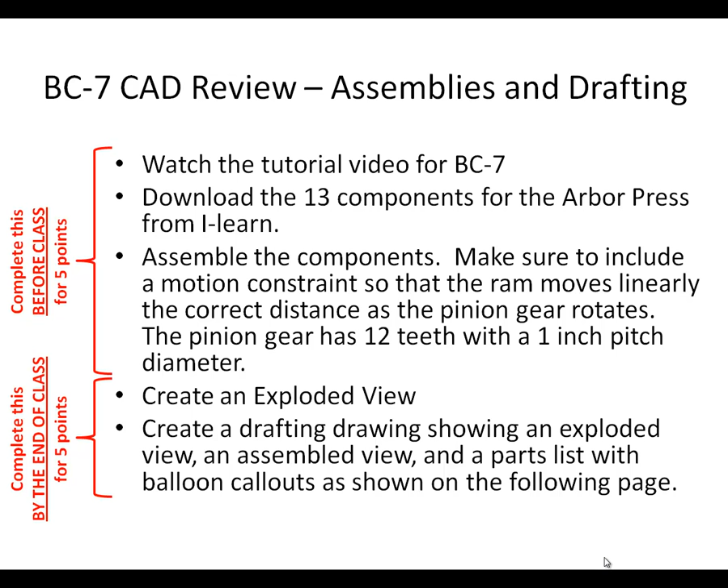For the remaining 5 points, those 2 bullet points can be completed during class time: create an exploded view, create a drafting drawing showing an exploded view, an assembled view, and a parts list with balloon callouts as shown on the following page. So during class I want you to create this drafting view. Let's get started.

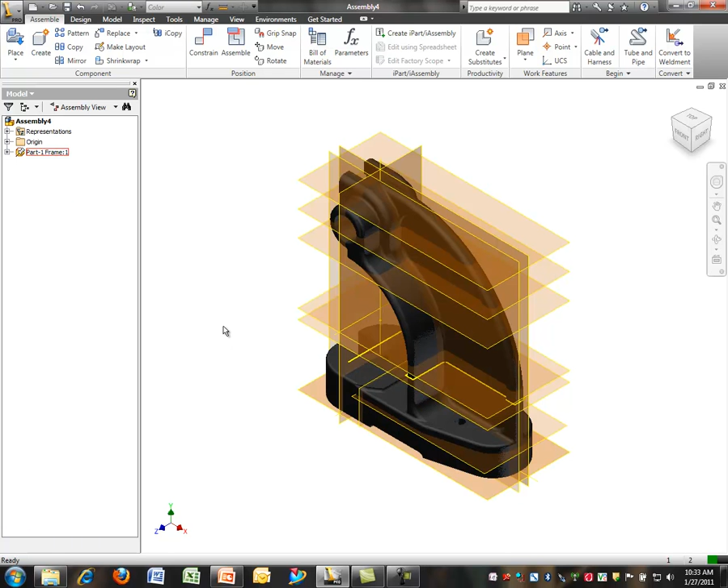First you'll need to download these 13 parts from I-learn. Let's do a new assembly, and we'll bring in the very first part, the frame. Notice that when I bring in the frame, it shows this little push pin—it's grounded the first part so I don't have to constrain it at all, since it can't move. Now I can go ahead and bring in the second part.

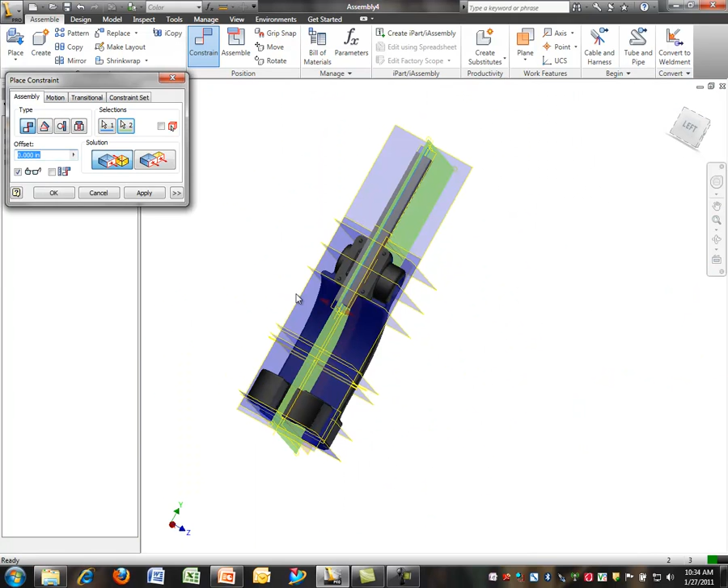Let's bring in the ram, and we'll constrain it. We'll bring this plane mated with this plane, and take this datum plane, center datum plane here—that's all the constraints the ram needs. We can see that we can move it up and down, but not side to side.

Let's now bring in the pinion shaft. The pinion shaft will need an insert constraint. Let's insert this circle up against the edge of this hole.

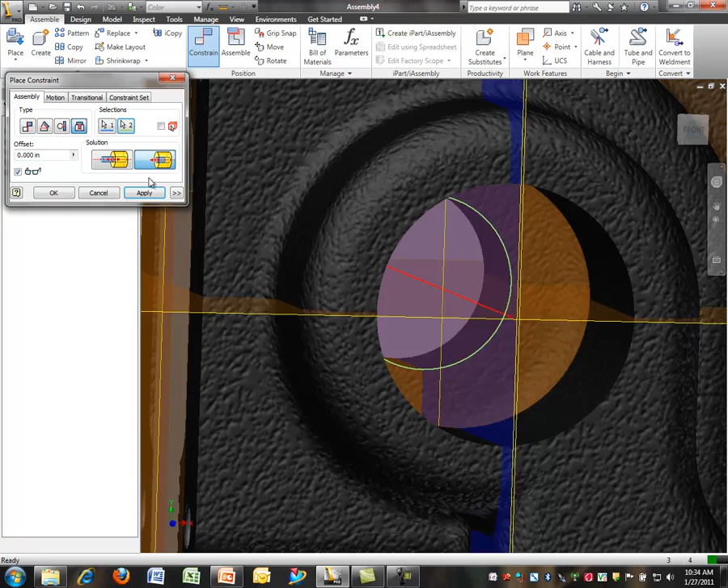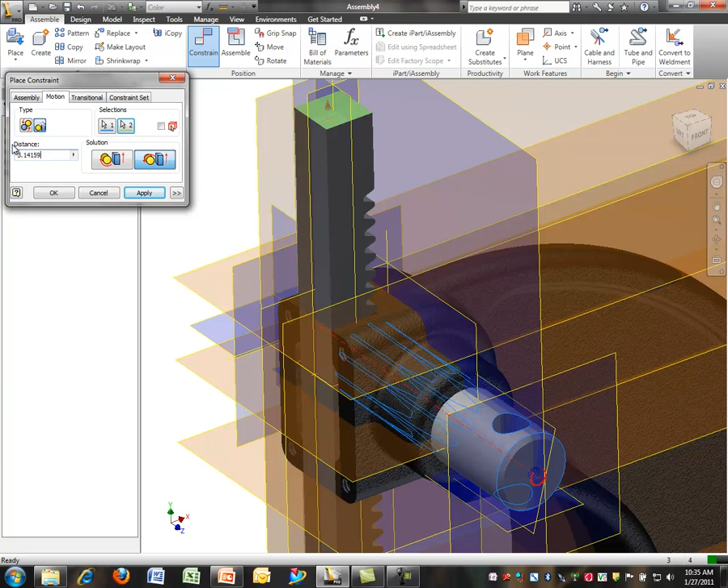There's the pinion shaft, and now let's put a motion constraint between this pinion shaft and this ram. We'll make it this linear circular to linear constraint, and choose this option so that as we rotate it moves the direction we would like. Because it's a 1-inch pitch diameter, every time I rotate the pinion, the ram should move pi times the pitch diameter. Let's apply that.

Okay, so now as I grab hold of this pinion and rotate, the ram will move the correct distance because I specified that in a motion constraint.

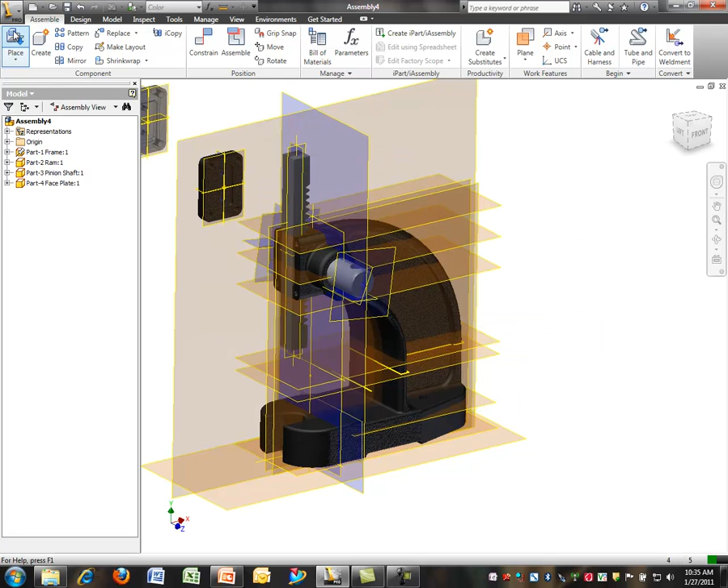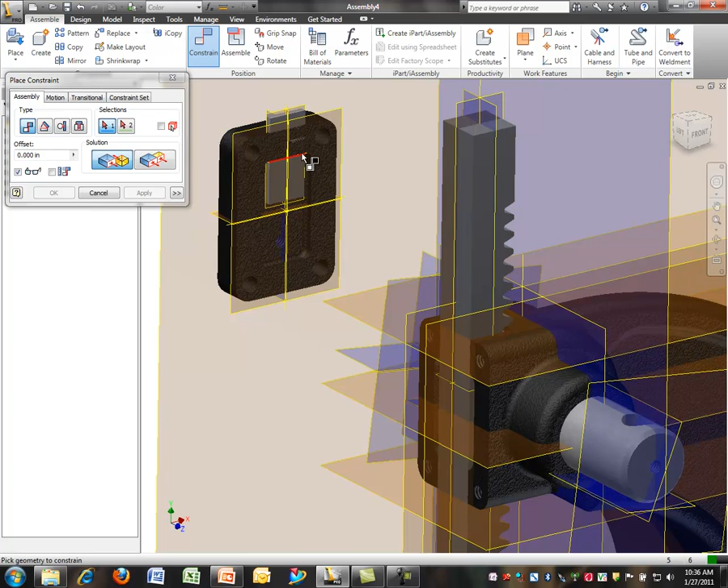Now let's bring in the next part, this face plate. We're not ready to constrain it yet because we need to bring in the jib plate first. Let's bring in the jib plate and constrain it so that it's flush with this face, and make sure it's centered in the face plate. We'll take that plane and this plane, bring them together, and do it vertically as well—this plane and this plane, making those flush. So now the jib plate is inside the face plate.

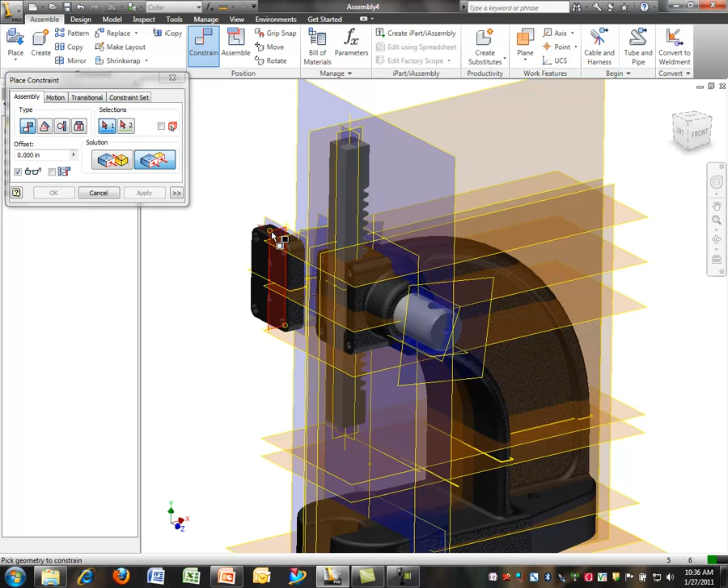Now we're ready to bring the face plate up against the main frame and center it. Okay, so now we have the face plate on. We're ready to go grab another part.

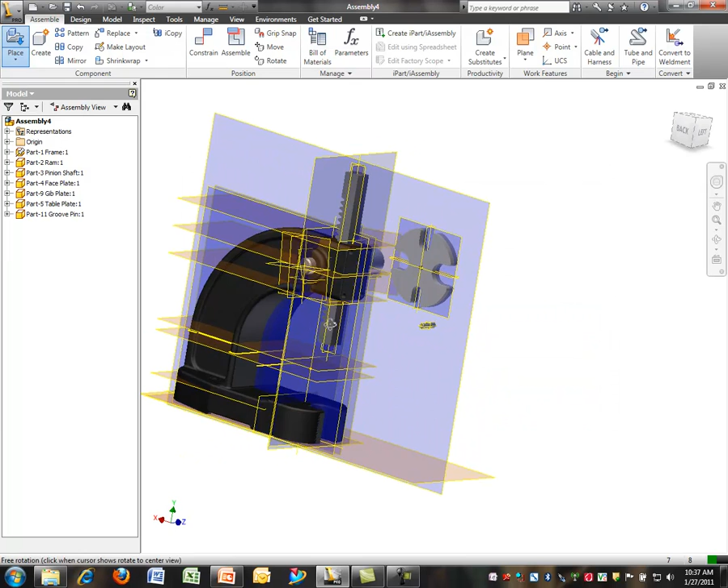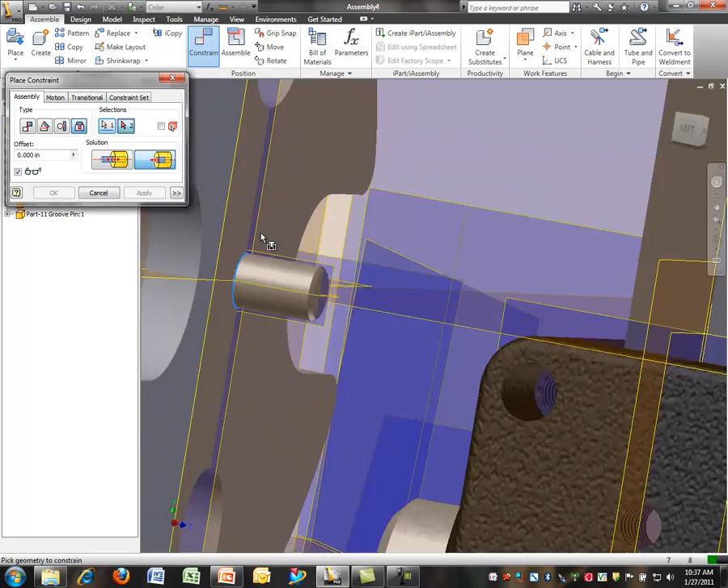Let's grab the table plate. We're not quite ready to constrain it yet because we need the groove pin. Let's constrain this groove pin using an insert constraint, inserting the end of the groove pin up against the end of this hole with that option—that's a press fit. That groove pin has a groove, so you'll pound it in and it'll be wedged into that table plate. Now let's take the edge of this hole and insert it up against the edge of this hole with that option.

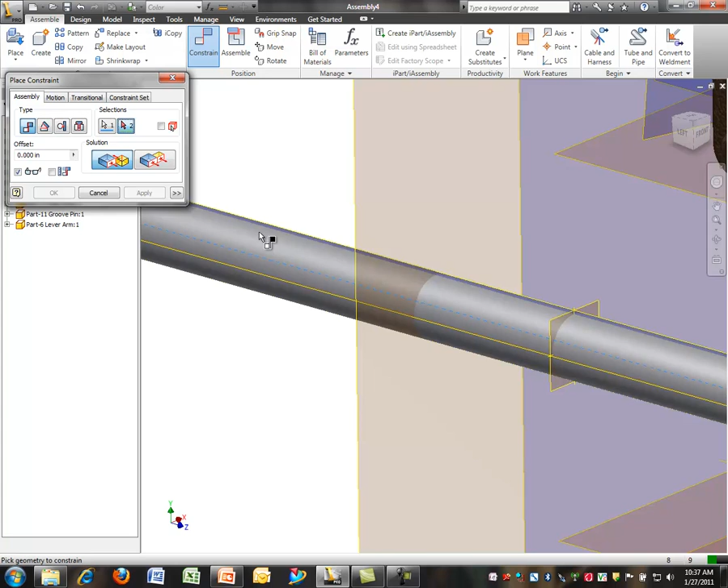Let's bring in another part—now the lever arm. We'll constrain it by taking this center axis and putting it inside this center axis, and then taking this plane and mating it up against the datum plane for the center of the pinion, making it flush.

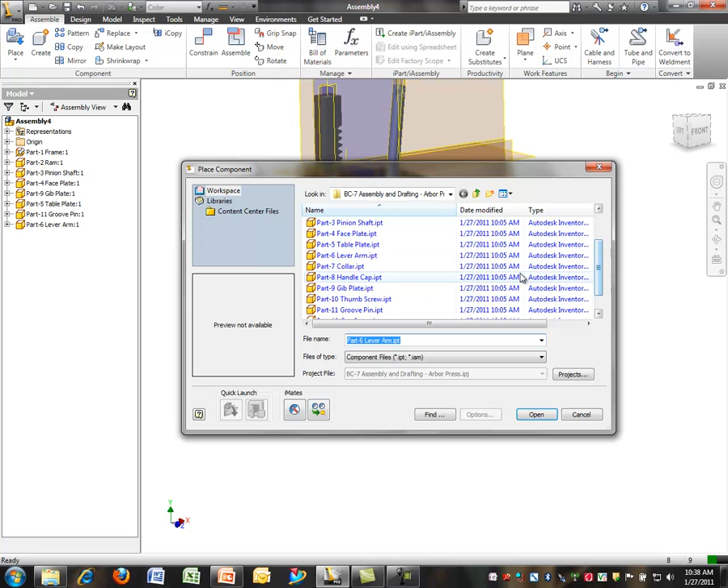So there's the lever arm. Now let's go ahead and bring in the caps, the handle caps. We're going to need 2 of those, so we'll place 2 and constrain them with the insert constraint, grabbing the bottom edge of the hole and inserting it up against that handle. We'll do the same with the other cap on the other end.

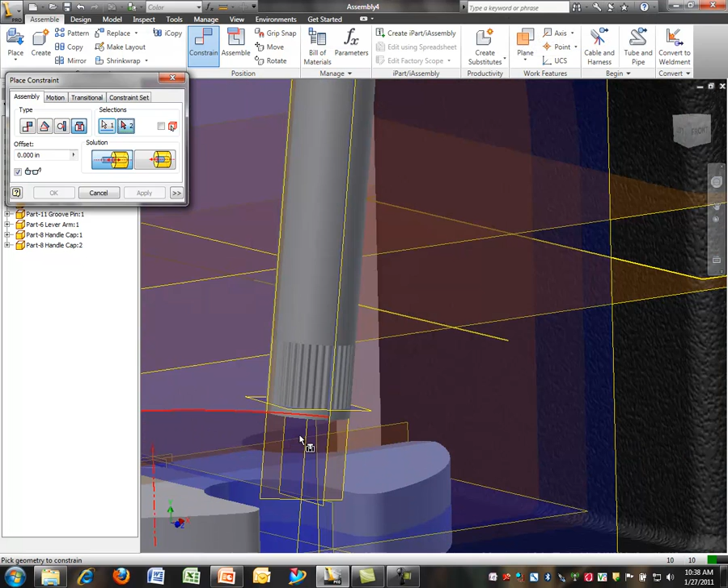Okay, now let's bring in the collar. We'll take the insert constraint and insert the edge of this up against the edge of this hole. Apply that constraint. And now let's also take the center plane.

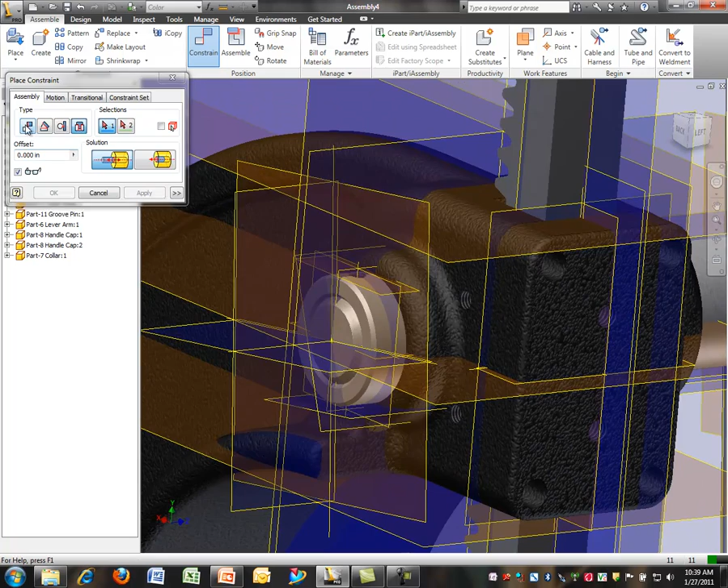We want that to rotate with the pinion shaft, so we're going to align the planes with this flush constraint. I'm going to go ahead now and turn off all these datums that are becoming such a nuisance to look at. I needed them so I could constrain some datums together, but it also makes it a nuisance to look at, so we might need to turn those on and off as we place different components.

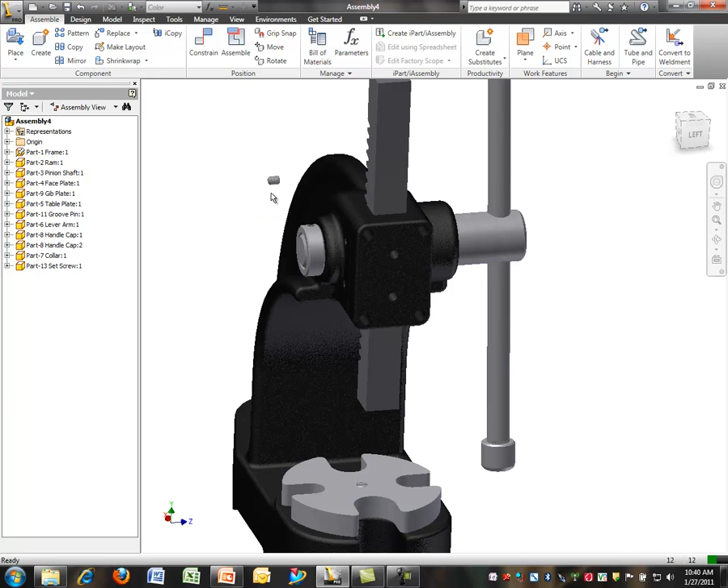Now let's bring in the set screw. I'll place the set screw here, and the first thing I'm going to do is rotate this set screw so that it's approximately in the right orientation so the computer can assume the correct position when I make these constraints.

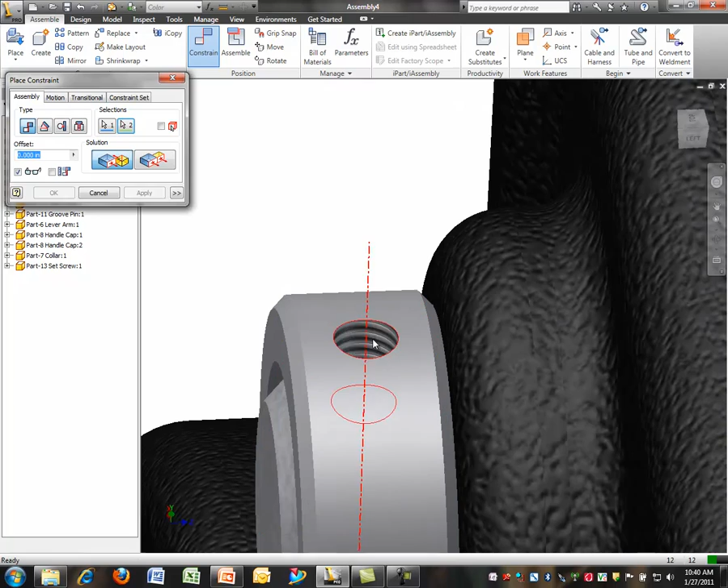What I'll do is take this center axis and align it with the center axis of the collar, and apply that. Then I'll make another constraint, a tangent constraint of this face, tangent up against that cylindrical face of the shaft. That places the set screw up against the shaft.

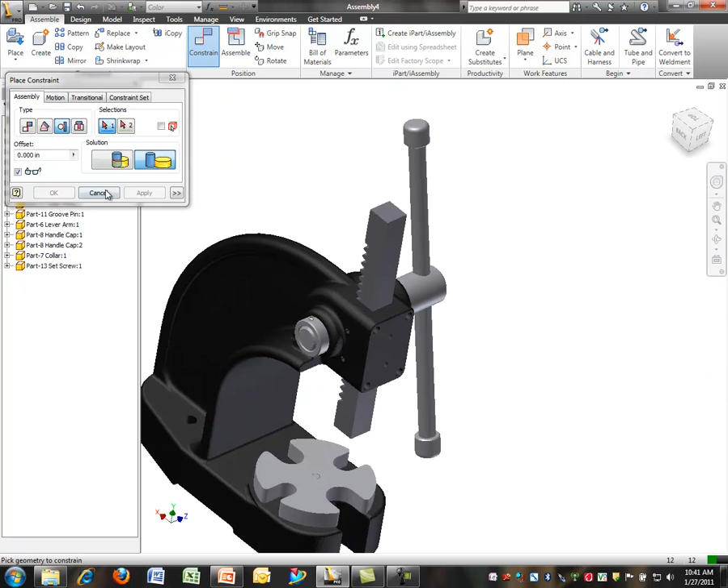Okay, now let's place some thumb screws—1, 2, 3 thumb screws. I'm going to go ahead and rotate those and orient them so that they're roughly oriented the way they would need to go into the assembly.

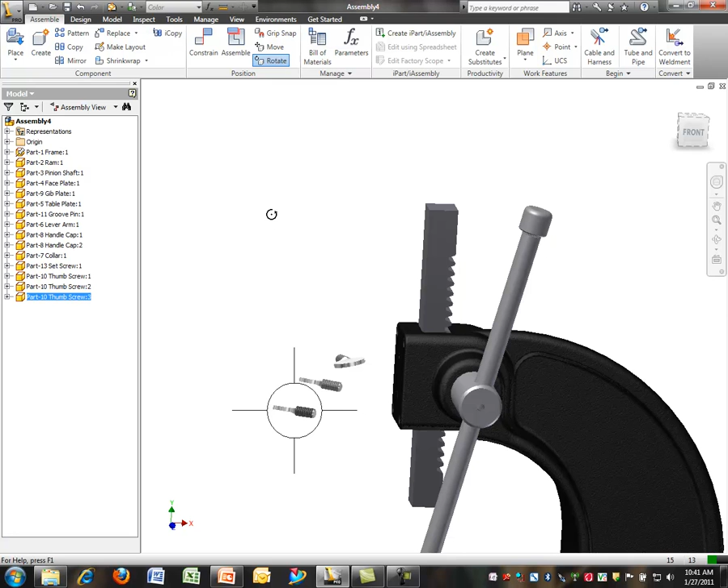That way the computer will assume correct constraints for me. And I'm going to make this one aligned with this center axis of this hole here. I'll take this one and I'll align it with the center axis of the hole here. And I'll also do the same with this one. Align it with this center axis of the hole.

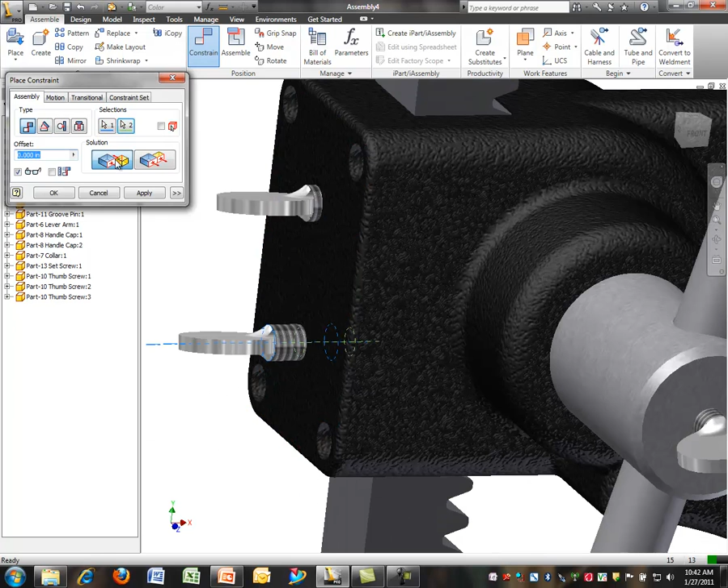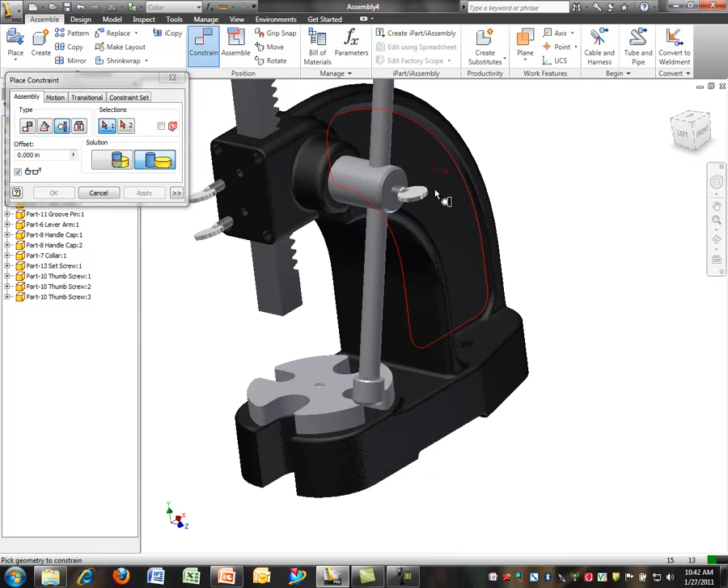We'll apply those. Okay, but now we'll notice that these thumb screws can still be moved in and out. I haven't placed them up against anything. So let's do that now. Let's create a tangent constraint, and we'll bring that end face up tangent against this cylinder. We'll take this end face and put it up against the gib plate.

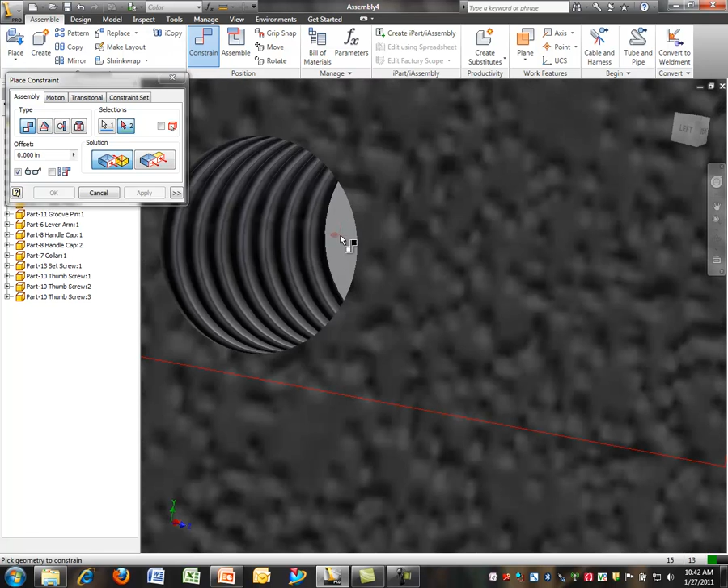And we'll do the same with this other thumb screw. That end face up against the gib plate. Okay, the only item I have left to bring in is the cap screws, so let's bring in the cap screws, and we'll place 1, 2, 3, 4 of those, and we're going to use this insert constraint to place

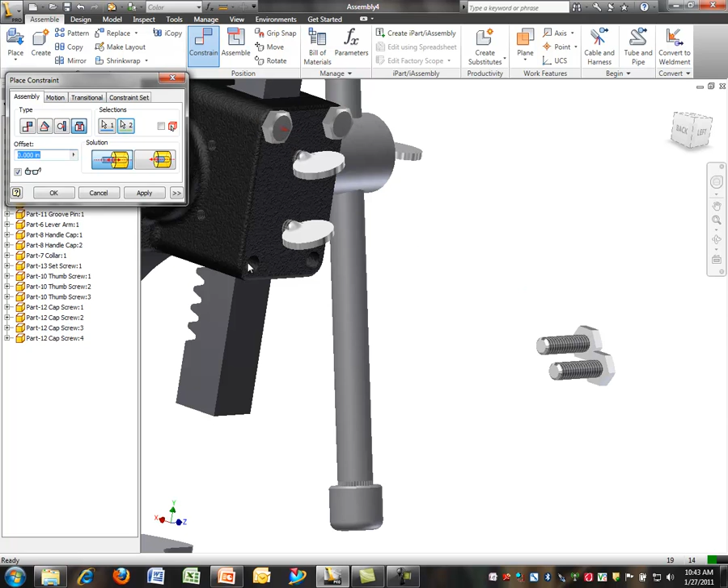those cap screws. We'll insert the top shoulder onto the edge of this hole, top shoulder here onto the edge of this hole, top shoulder here onto the edge of this hole, top shoulder here onto the edge of this hole.

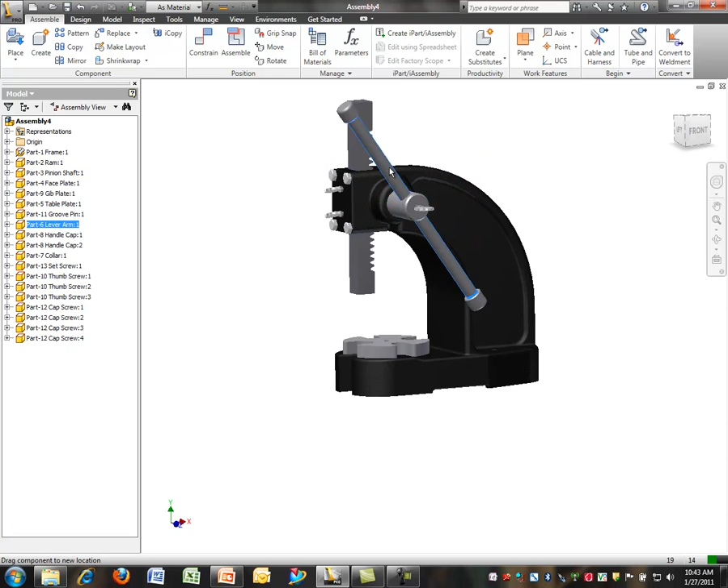Okay, now we're assembled, and if we wanted to, we could grab this arm and we could even move it and watch the arbor press operate, because we've put that motion constraint. So this completes the before class portion, which is worth 5 points.

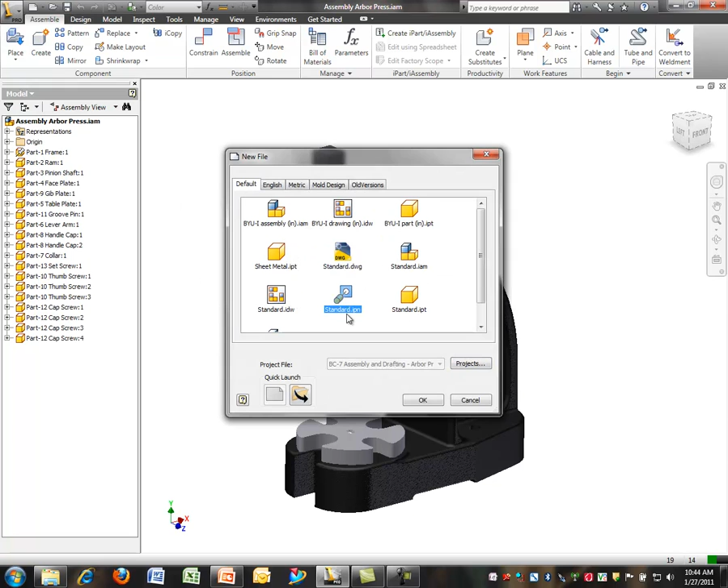Okay, now that we've completed this assembly of our arbor press, let's create an exploded view. We're going to do a new, and this time an IPN file, which is a presentation file. Let's tell it which view we want to bring in. We want to bring in the assembly into this presentation file, and we'll manually create the explosion. And we'll view it from this angle.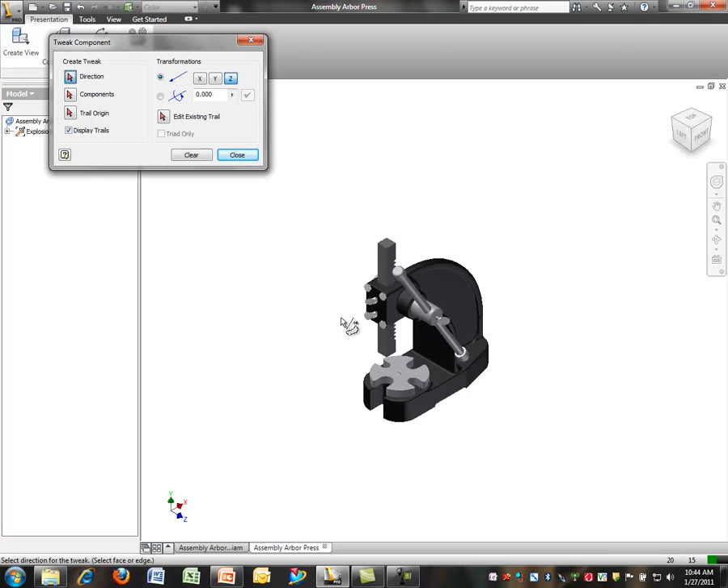And let's go ahead and tweak some of the components. The first thing we'll do is we'll specify a direction. Let's just choose this direction. I'm going to be moving things in that Z direction. And let's choose all the components we want to move. All the bolts here, as well as that face plate, and let's also get the jib plate. So we'll use this toggle method to get the jib plate.

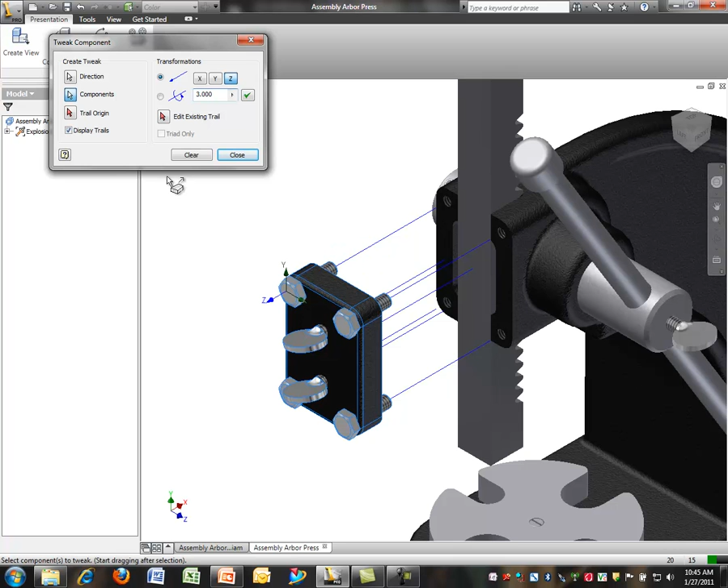And now let's go ahead and move those probably 2 inches. Let's go ahead and go 3 inches. And now we will unselect the face plate and unselect the jib plate, so that now I'm only moving the bolts, and let's go ahead and move those out 1.5.

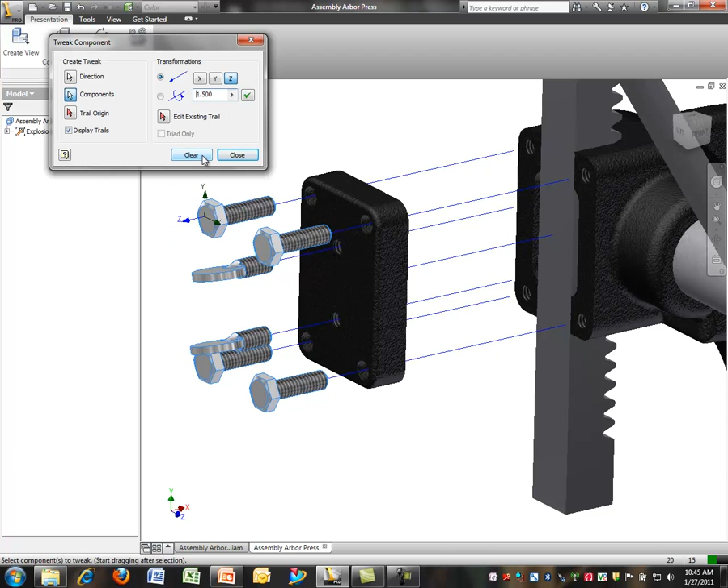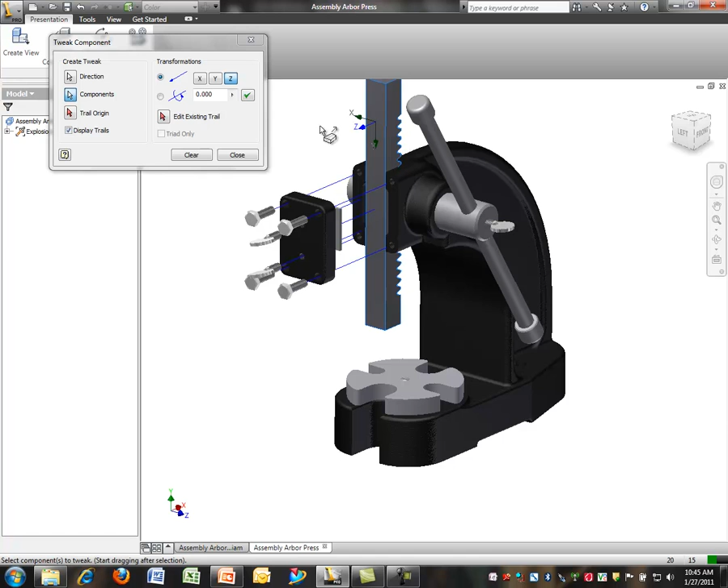And let's clear that out, and we'll come around and we'll specify a direction for the jib plate. And we're going to move this jib plate, let's move it about 1 inch away. Okay, so now we've disassembled these portions. Now let's tweak this ram. We'll specify that direction, move the ram, and let's move it, should we say 1.5 inches?

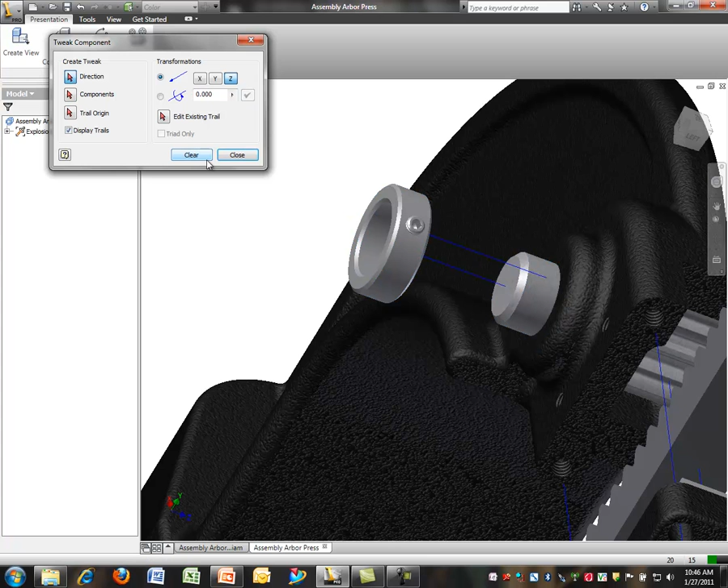That looks good. Now let's pull off in this direction the collar and the set screw. And we'll move that about 1.5 inches out. Now let's move in this direction this set screw, and we'll move it about 1 inch out.

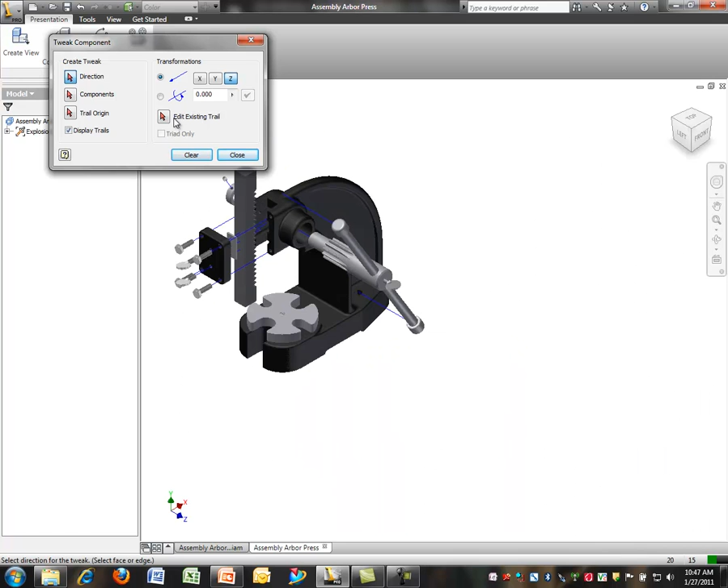Looks okay, so now let's specify a new direction, and we'll move the thumb screw, the handle, the 2 caps, and the pinion shaft, and let's move that out maybe 4 inches. Now we'll move in this direction. We'll move this handle and this cap, and let's move it, try 7.

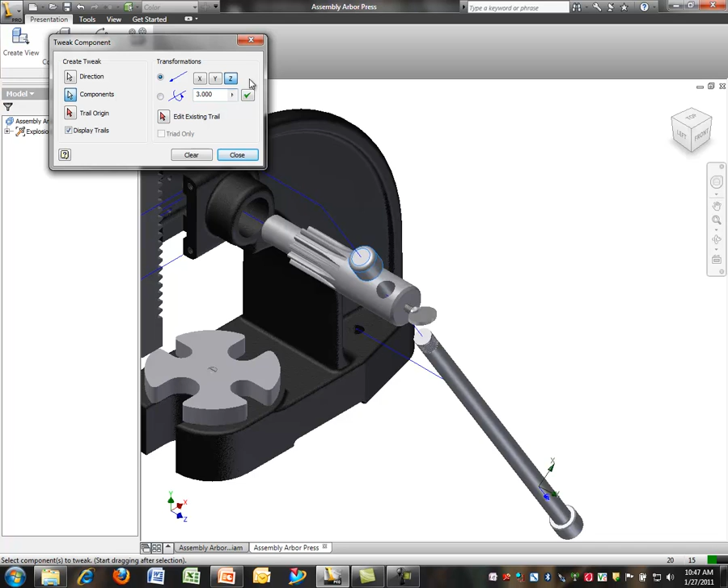And let's unselect those 2 components and select this one. We could move this in 3 inches. That looks a little nicer. Okay, the next thing we'll do is we'll specify this direction and those 2 components. Of course, deselect this component. And let's move that probably 2.5 inches. Looks about right.

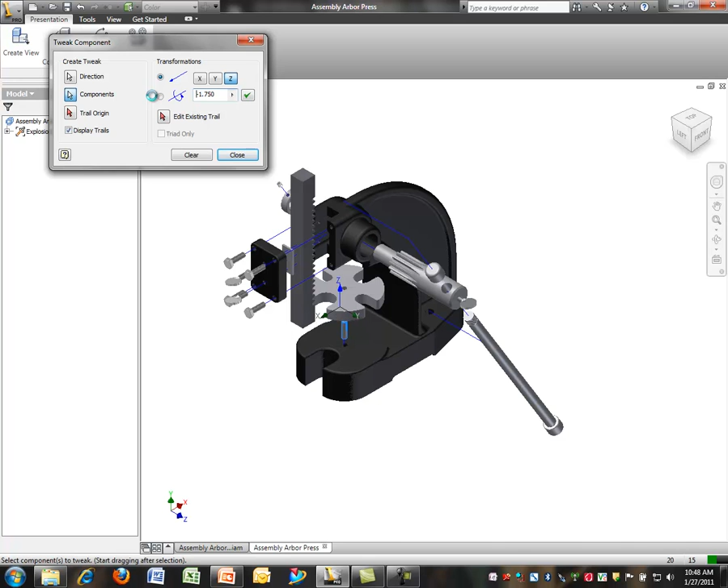Unselect this component. Let's move even -1.75. That looks better. And now we will clear that, and let's specify a new direction. Move this pin. We can move that out about 1 inch. Okay. But maybe I don't like all these trace lines. So if I don't like to see them, I could just make all those invisible if I wanted to.

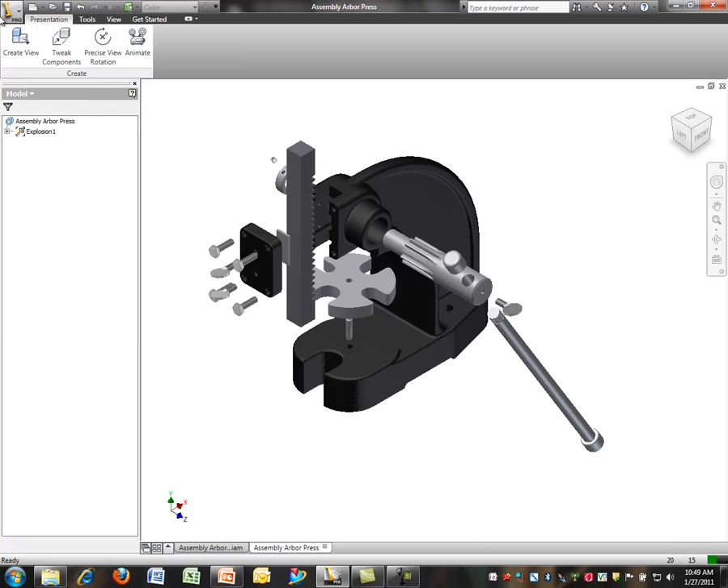Okay, now that our exploded view is complete, now we're ready to do a drafting view. So we'll do a new drafting drawing. We'll fill in our title. We'll call it BC-7 Arbor Press. We'll put in our name and the class, ME280. Brings in a blank title block.

Now let's place a base view. The first thing we'll do is place the assembled view. So let's go get the assembly. And let's make it a 1/3 scale, shaded, viewed from the top left. That looks good.

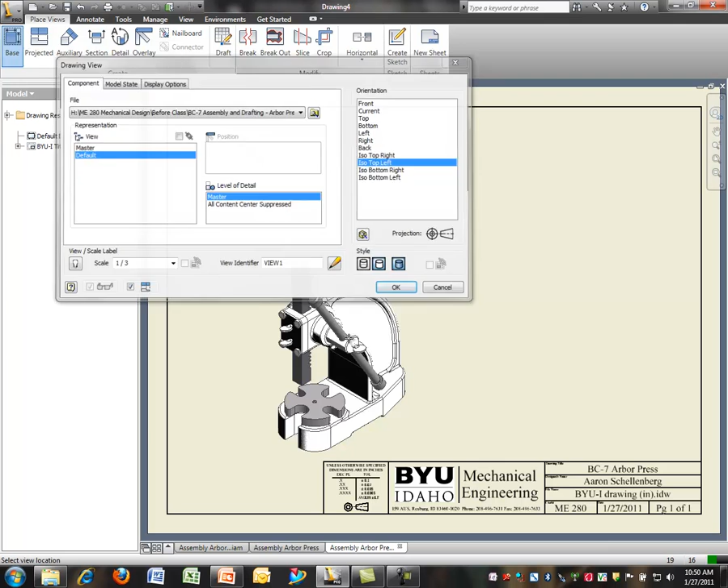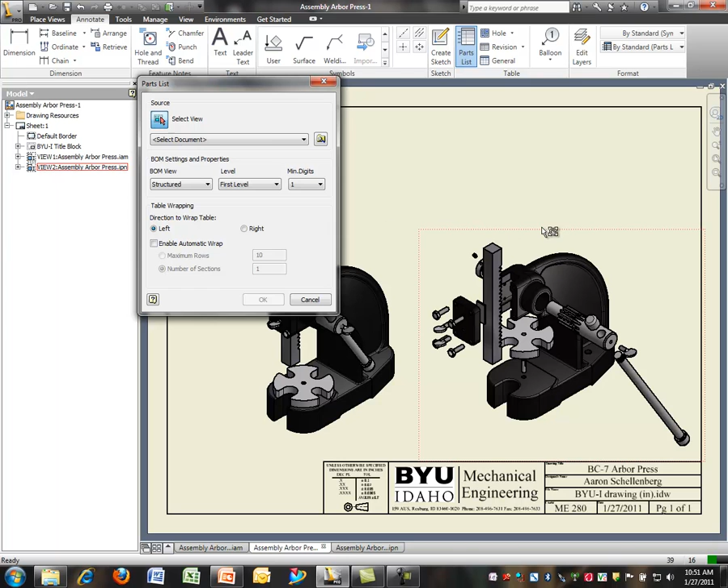Let's place another base view, and we'll get the exploded view. We'll choose this IPN exploded view, and let's make it also shaded and viewed from the top left. We're ready now for a parts list. We'll select a view. We'll make the parts list on the exploded view. I'll hit OK so that it will enable it.

There's our parts list. So now let's create some balloon callouts that refer to that parts list. We'll do a balloon callout for each piece. I'll click and then right click and say continue when I'm finished.